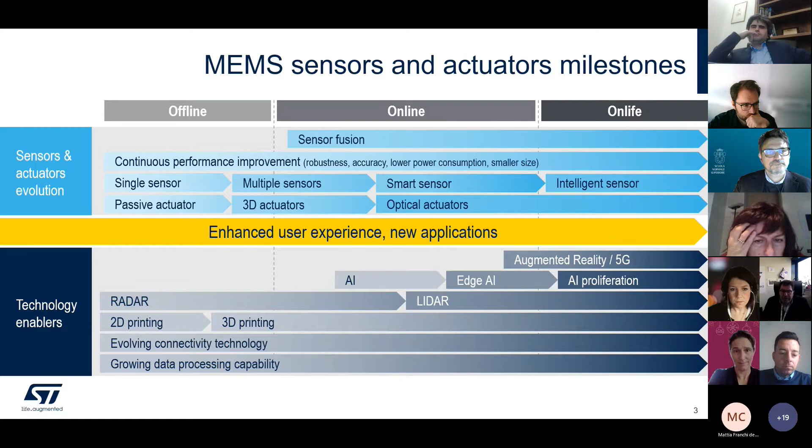With a lot of technology enablers, as you can see, radar evolving to LiDAR, and in the meantime increasing the bandwidth thanks to 5G. But we also have AI introduction with online periods with the cloud and offline processing. Next step was the Edge AI introduction, and now we have a proliferation of different technologies.

If we go a little bit more in detail, again it was a paradigm change. Offline era, 2000-2010, MEMS technology: accelerometer, passives, PC, wearable, smartphone. In the offline era, MEMS was established and ST made the bigger jump, the bigger true penetration inside the usage of this technology in everyday life, in cars, printers, gaming, smartphones. Everyone knows this seems like an archaeological era - you can imagine something that was hundreds of years ago, but it was only 15 years ago, no more than this.

Just an example: we started to interact with our phone, which became more and more a piece of our extended, augmented capability. With the 5 senses, with our brain, with our hands, we enabled the sensors - the MEMS enabled a new way of interacting with the mobile phone, becoming something extremely interesting in terms of human-machine interaction. At the time we have accelerometer, gyroscope, magnetometer, microphone. The list of sensors in the 2000 era was extremely limited.

2010 to 2020, we started with increased usage. As we know, our company is leading the miniaturization, leading not only the R&D and technology enablement of the sensors, but also the manufacturing. We lead evolution, we lead performance improvement, technology fusion - several technologies embedded together, embedding and coupling sensors with MCU, with connectivity, and starting to enable cloud service. In the meantime, sensors were adopted everywhere, not only in consumer but also with different specs mapping onto industrial, medical, automotive, thanks to this increase in performance. And the smartphone started to super-miniaturize and integrate different functions and features.

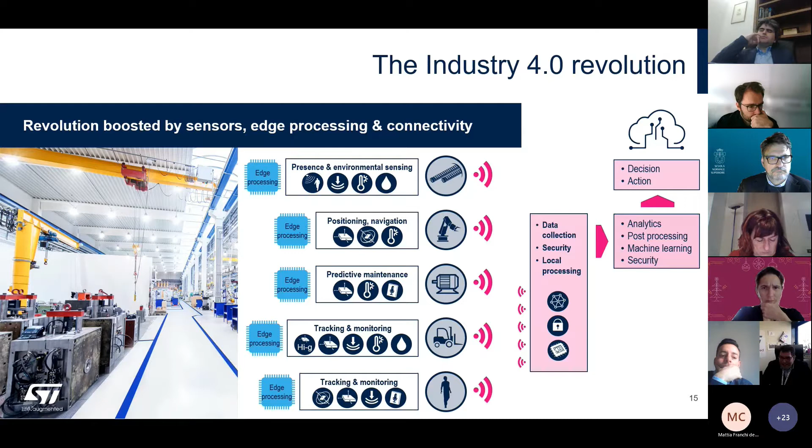Now there is another challenge in this onlife ecosystem, the automotive. Up to date, automotive was only discussing more or less navigation and presence positioning. The connectivity is enabled by V2X, telematics box. But don't forget the electrification revolution: road noise cancelling, battery monitoring, condition monitoring, door modules, and let me anticipate, predictive maintenance of the remaining lifetime of the electric machine.

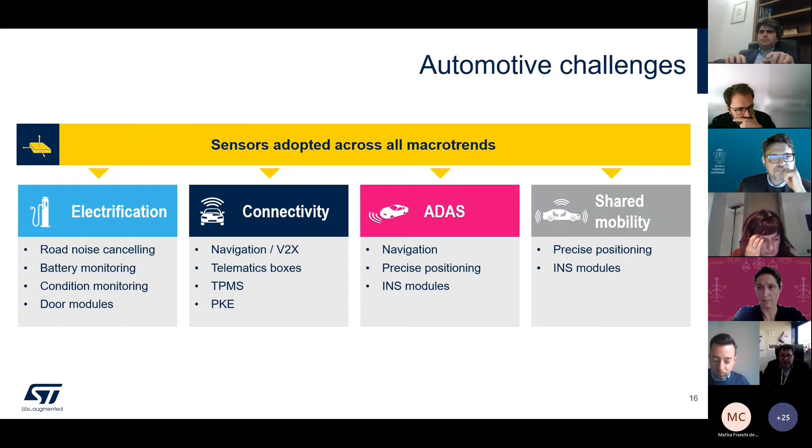Thanks to enabling detection of vibration, gearing and other kinds of nice things that will become the new oil check in your car in the future, when you will have a check of the bearings of your electric machine, or a check of the eddy current inside your electric motors. This is a wave of new introduction, a wave of automotive application, MEMS enabled.

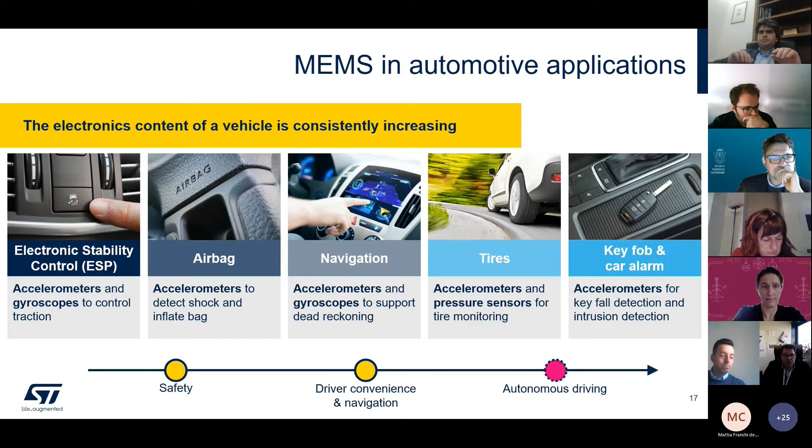Don't forget that these will be, up to today, already available — it's not the future. ESP, airbag, navigation, tire pressure monitoring, car alarm.

On this, we are helping people and the whole technical community to touch, in a nice box, the capability of our processing and sensing. It's ST-WIN, a brand of ST, able to work with Azure or AWS. I let you play with it — it's, let me say, a nice gadget, but is a good way to start to explore our capability.

But if you imagine now what is the next step: the onlife era. Until today, we talked only about sensors, standalone, sensor fusion, and now we're starting to talk about what is the next step. The onlife era, the fusion of technology and life.

Because now, if you imagine these sensors and actuators, you start to imagine the embedding of intelligent devices able to sense, process, and take local action. This way, your personal electronics will start to learn your preferences, your attitude, your habits. Industrial equipment will start to be customized thanks to a wave of new sensing nodes able to talk to each other, but also to decide at local level and enhance productivity, reliability, safety, control.

Just imagine cobots, two, three, four cobots working together, with the capability of safety to avoid collisions, or in the future, trajectory control not through encoders or resolvers, but using the real positioning in space of the robots to close the loop and actuate the electric machine, making the robot able to work.

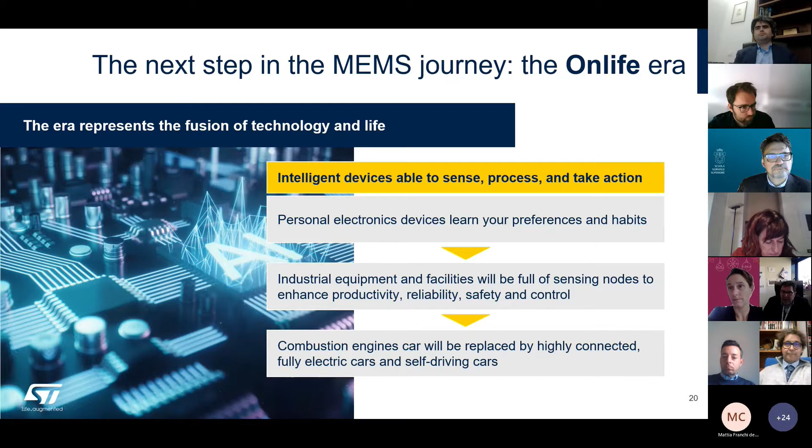So at the end, we are working where systems, where sensors live, are completely different. First decade, offline era: fragmented, every sensor in a place, making a single function interconnected with the main CPU. Online era: connected. Again, we will have a new interwired node data exchange, local processing up to a certain level.

Third step: trained AI at local decision. Maximum privacy — it's not a camera, it's not a detection of your life. It's a pure sensor with the capability to say yes or no, to make an action or not, without transfer of information, except what is needed locally for making the decision that was programmed by the human designer and project.

Where the sensors live is increasing the efficiency, because if you have the possibility to work with a new environment with a lot of sensors helping our equipment and our decisions make a better projection for the future, at the end everything will be more sustainable in terms of efficiency.

If we have an electric machine working in a bad bearing situation, using very bad efficiency in terms of electric consumption for a bearing problem, our vibrometer sensor will be able to detect there is a problem in the electric machine and alert maintenance, or swap to a different mapping of the inverters, able to increase the efficiency and overcome the aging of the electric machine.

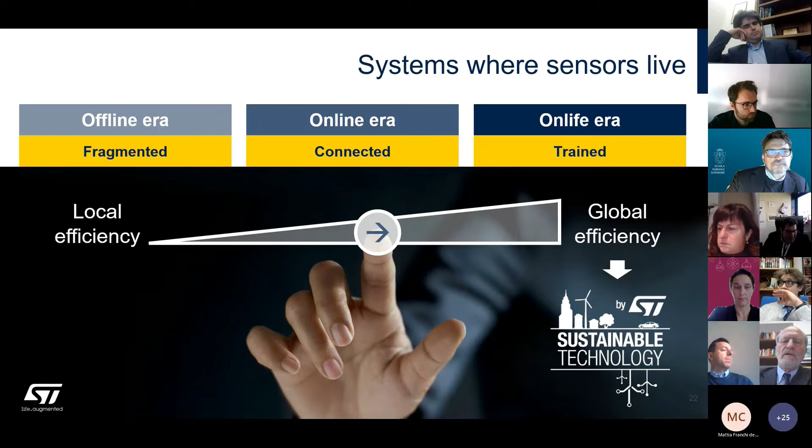Don't forget, in Italy today, just as an example, 65% of electric energy consumption is in electric motors, in industrial and residential, not yet in electric cars. So if we are able, thanks to better control using a pervasiveness of vibrometers, to increase the efficiency by 1 or 2%, we can save a lot of energy, a lot of real impact in the global green footprint.

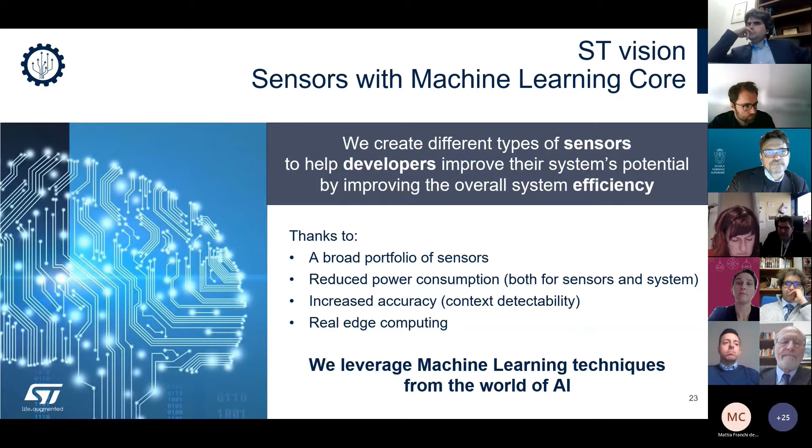But don't forget, we have a vision on that. The vision is to enable sensors with embedded machine learning. We are creating several different kinds of sensors. We have the possibility to help developers, the technical community, work on a broad portfolio of sensors, reduced power consumption, increased accuracy, and leverage, thanks to real edge computing, the machine learning techniques from the AI world in embedded solutions. Just an example, meaningful data.

This can help from the cloud, but not only, because to arrive to the cloud, to execute code in the cloud, to execute an FFT in the cloud for every node in a factory or a fab, is extremely expensive, extremely bandwidth heavy. It's different if you have sensors in the real asset, thanks to local AI able to understand which kind of meaningful data are available. Thanks to the network and connectivity, it arrives to the gateway, and the cloud AI defines only, for example, the virtual model for the extremely high-level discussion, but acting at the low level.

So at the end, we want to work on going from real data to meaningful information to be transferred to the cloud. In the meantime, capture data, streaming, transformation, modeling, and arrive at the data-driven decision, to move to the top level only the portion of the data that is extremely important.

And again, this is something we enable not only in terms of sensors, but also in terms of tools. ST tools able to help you in this fast development and fast prototyping phase, with tools like Algo Builder or Unico, with tools like the NanoEdge AI, the STM32 Cube AI, enabling thanks to the STM32 a lot of features of security.

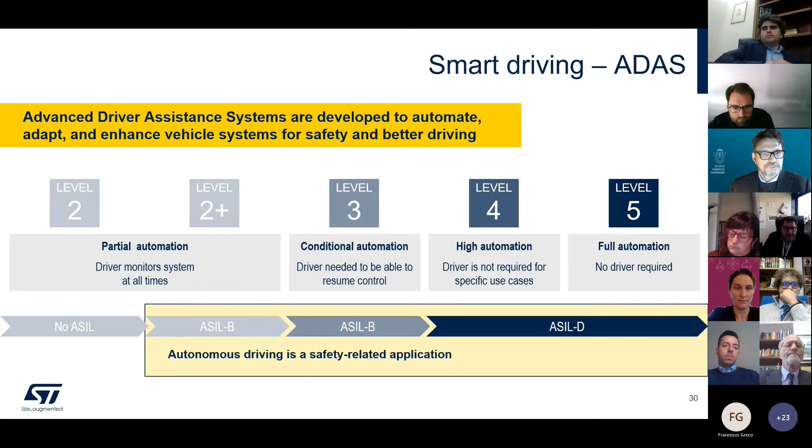You know already our main enabler is on camera solutions, but don't forget that we are working also on the hardware and software layer, starting from the needs and looking at the end solution.

This is my last chart with takeaways. Sensor pervasion will keep the pace. Multiple sensors, interconnected, edge processing. Now we are entering this new era: sense, process, take action. This has enabled a second wave in a sustainable manner.

And now developing sensors and actuators that meet the needs of our customers, partners, R&D people, and developers. This is thanks to the fact that we are pioneers in the sensors ecosystem, and now we are looking to the future, day by day, with you.

This is my last slide. I don't know if you have any questions. If any question, I'm here. And thanks a lot for your time today and for your attention to our value proposition of this online era.

Thank you, Nunzio. It is impressive, the progress of technologies that we are witnessing these days, particularly the slide showing the advancements in 10 years, in terms of metrological performance, power, and so on. It's impressive. Clearly, there is a huge quantity of societal issues that are raised.

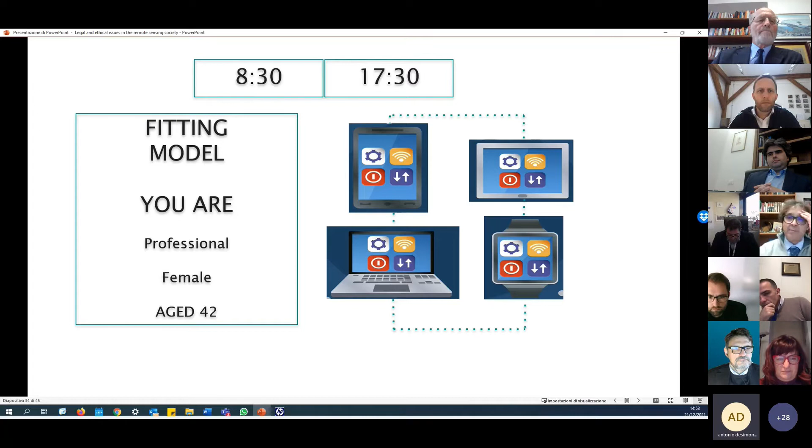All this is triggered without knowing who I am actually. Now I will go directly to the conclusion. At a certain moment in my day, I am my wife. Now, just to conclude, what this means is that either the model gets it wrong, or the model is getting too much right.

It's able, even without formally using or employing any personal data, to target me according to a model that combines and analyzes the different uses of different devices, regardless of their belonging to some person. Which is worse, if you think about it: if at a certain moment in time, maybe every other weekend, I am a teenager or a young kid, this enables another model, a prediction model, to be applied on me.

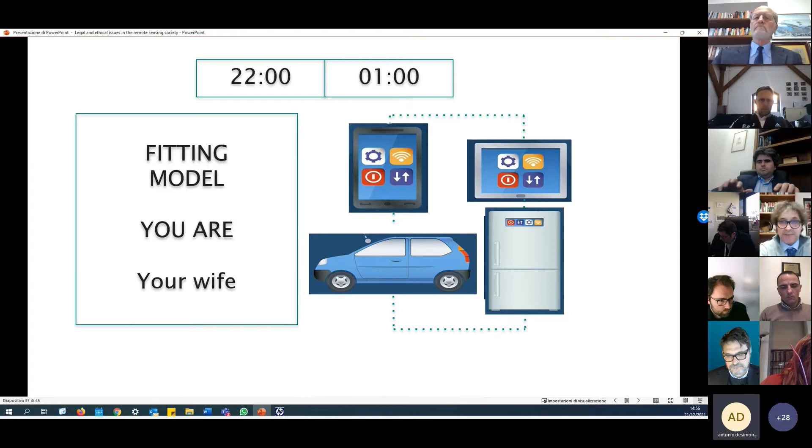We cannot behave like that. At least we cannot stay in the ignorance of what are all the legal and ethical implications and constraints from design to deployment of our sensors. I will not continue with that and just reach my closing slides.

On last century, this was the world. It's not that world anymore. I didn't have the time to insert the new slide, which I will display eventually in another seminar that Calogero will be organizing. Thank you for your attention.

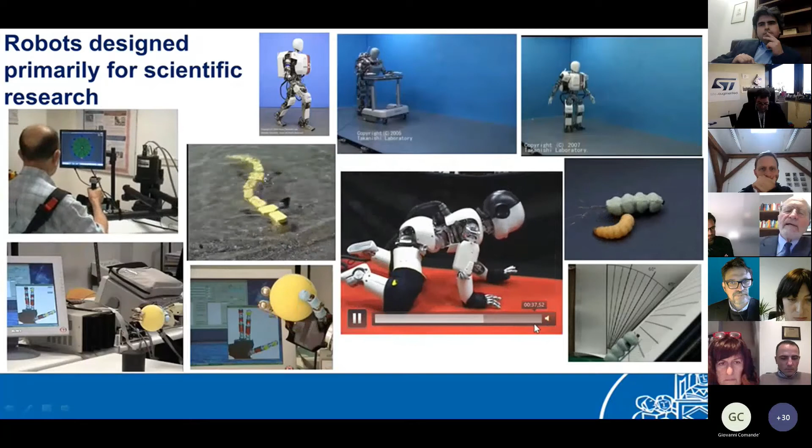First, I'd like to say something about what biorobotics and bionic science is. It's essentially a new wave of work based on the fact that robots are not used just for applications, but are used as a scientific tool. This was not clearly accepted years ago. So we're talking about robot design primarily for scientific research, like we talk about robot design primarily for solving practical problems. This is analogous to what you have suggested for sensing science and technology, or science and engineering.

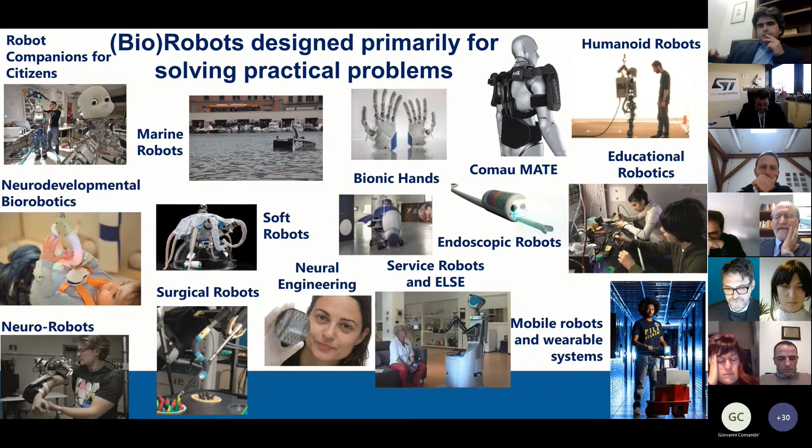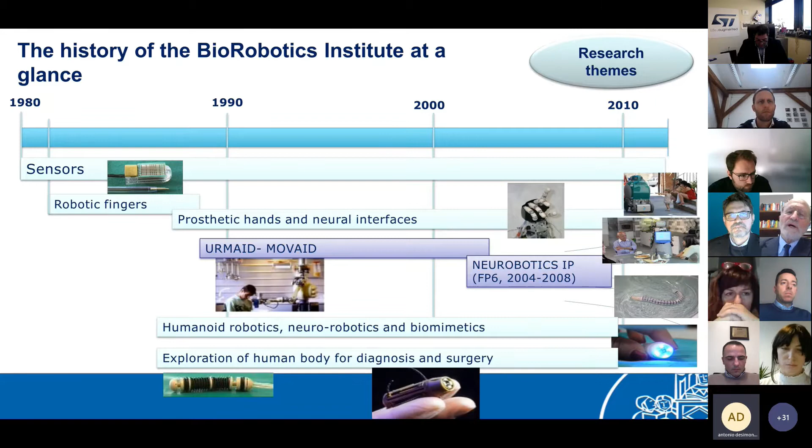So robotics is now everywhere. But actually, my own history and the history of our institute started with sensors. In the 80s, so 40 years ago, I personally started by designing sensors, and then gradually, beginning from the components, we aimed and dared to develop more sophisticated components and systems, essentially exploding into what I've shown before, so into science and engineering.

The concept we pursued is based on a mechatronic platform, because we have always been most interested in the mechanical platform, or the mechatronic platform. For many thousand years, the growth of technology in a broad sense was based on the integration of mechanisms, actuators, energy supply, and some sort of human-machine interface. And this was the history for most of the history of the human species.

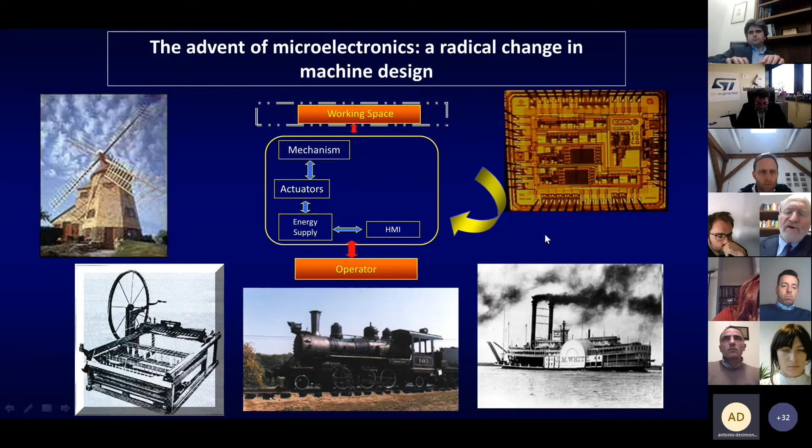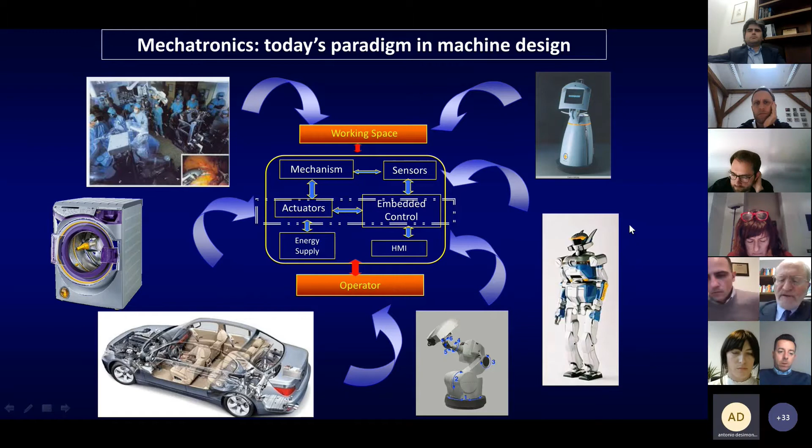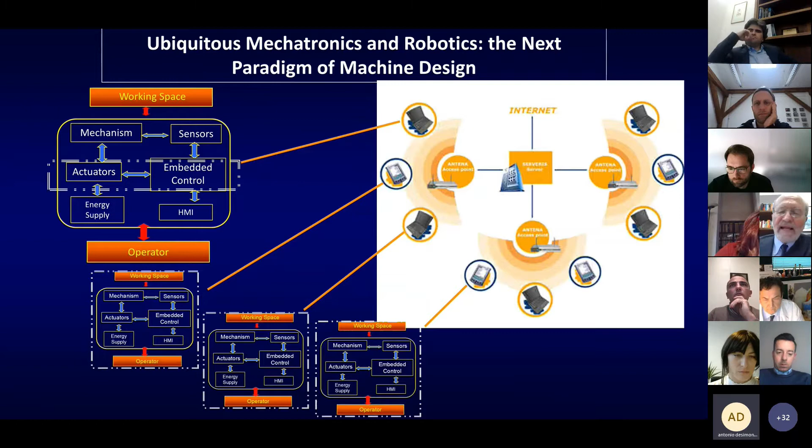But then in the 50s, a radical change occurred: the introduction of the transistor, some sort of intelligence that was then incorporated into the mechatronic platform. So in addition to the pre-mechatronic era, sensors and embedded control, essentially microelectronics, were introduced, so that today all devices, including systems and robots, are made like this, and they are also connected to the web. This is an engineering vision of what happened in the last 50 or 70 years.

And then there have also been talks given by colleagues about micro and nano machines. So micro and nano machines are also the miniaturization and integration of functions of this concept of the mechatronic platform.

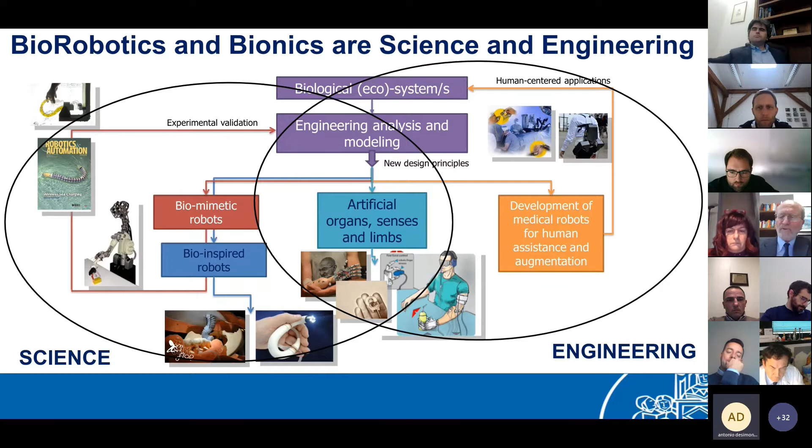In creating this idea of science-based engineering, I was, and am more and more convinced, that the right way to go is like this.

In 1949, the discovery of the sandwich transistor was recognized with a Nobel Prize in physics for people like Shockley. Then came the development of technology like transistors in computer design, the microcontroller, microcomputer, and eventually the robot that started in 1972 as the integration of mechanical engineering. This was developed at Waseda University, and microelectronics.

So from science to engineering. Actually, this idea has now been fully recognized by the emergence of journals like Science Robotics, by far the one with the largest impact factor in robotics. I've been a founding editor of this journal, and also of the Transactions on Medical Robotics and Bionics, of which I'm editor-in-chief.

So science and engineering is smoothly connected. I'm going to share with you a couple of examples of what this means, and how this is related to sensing science and technology.

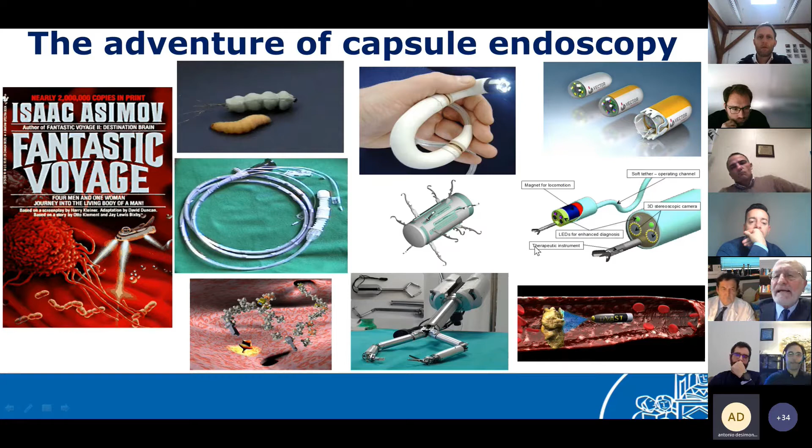For example, the adventure of capsule endoscopy, starting from real science fiction if you will, going to biomimetic analysis, and then to highly integrated classes of devices, just like this representation given by three very visionary surgeons — the concept of a miniaturized tool incorporating a number of functions, including many sensors and many actuators, many robots if you will, to perform operations inside the human body.

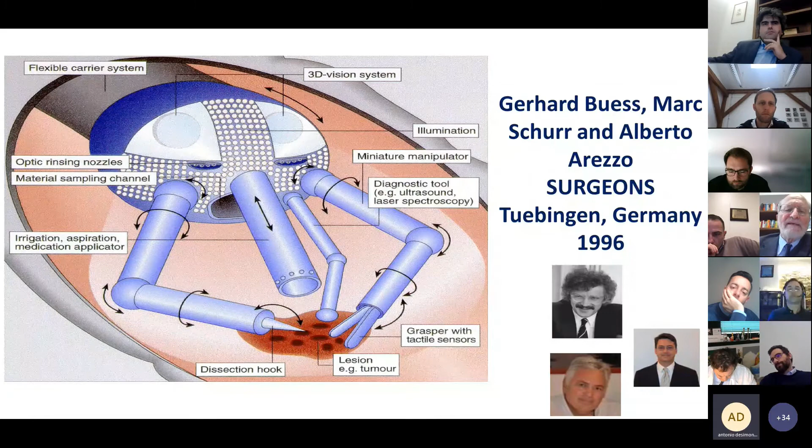In the early 90s, we were inspired by observation of animal creatures like worms to develop this. By the way, I'm very pleased to see here people who were my colleagues, actually my students or PhD students at that time, who are now all full professors — but not only that, they are deans, they are rectors, they are ministers, and so on.

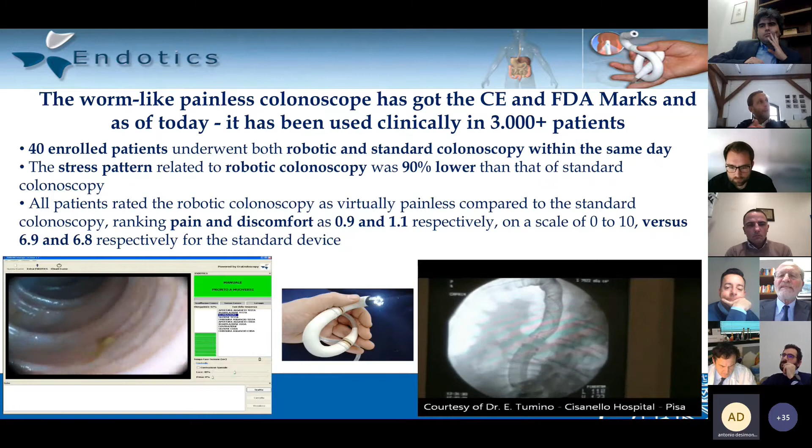Starting from this crazy idea at the time, we developed a painless colonoscopy system based on inchworm-like locomotion. Today this is a product — in fact, a startup company that we created at Scuola Superiore Sant'Anna is producing an inchworm-based colonoscopy system that has already been used in more than 3,000 patients.

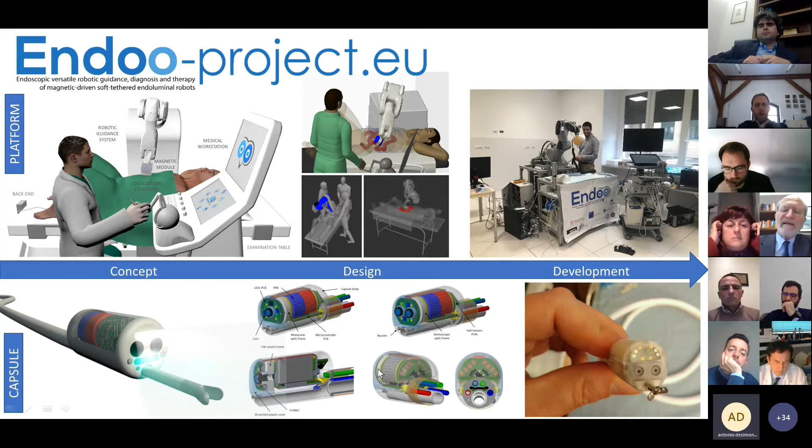There is more, as you can see, with a lot of sensing capability — for example, a very, very high resolution camera here inside this capsule, and robotics used. But this is just the beginning of an entirely new way of thinking about endoscopic capsules.

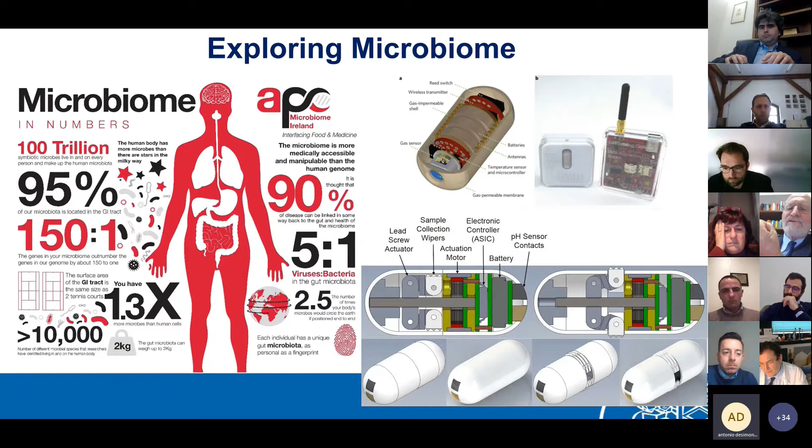For example, a capsule that includes sensors to monitor gastrointestinal health at large, many factors, and you see how a pill is full of sensors and processors, very high quality, very highly integrated, or how many different new sensors could be included in this hardware, if you will, to explore the microbiome.

Or even new configurations could be explored, like, for example, an origami robot, in which micro robots could be assembled, or an electronic nose for colorectal cancer diagnosis. This concerns the area of entering the human body with sensors and actuators, exploring and transmitting.

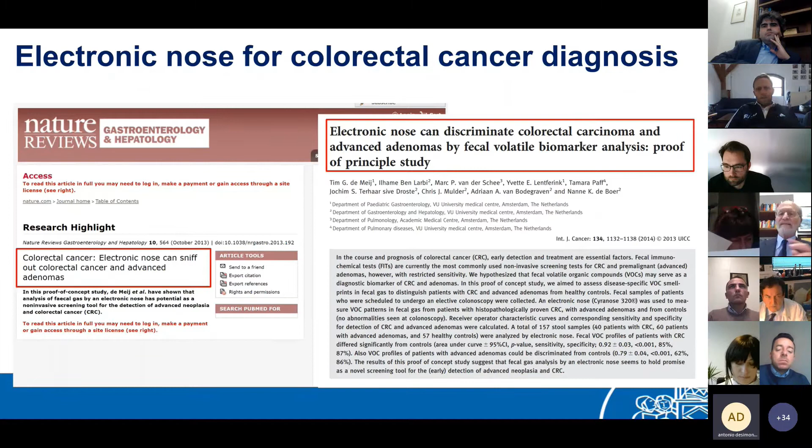So there is another very interesting example, that of the hand.

I was inspired by a movie like Star Wars to develop sensors of different kinds for hands, prosthetic hands, and robotic hands.

And here again, there are many people, including some that you have seen — Calogero is here, by the way, and Silvestro is here, and Alberto is here. So very interesting, once again, a vision and a dream, and the importance of sensors in this was also absolutely remarkable.

Together with Danilo De Rossi, in 1984 we published the first solution to a skin-like layered sensor, which was then developed by many others, including Beccai, now a PI at the Italian Institute of Technology, and Massimo Bergamasco, professor and director of the new Institute of Mechanical Intelligence. After the sensor, we were very sophisticated, by the way.

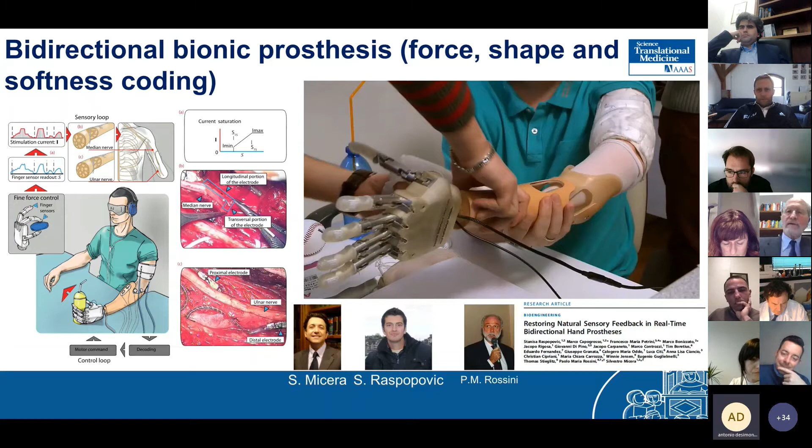We were able to mount the sensor on a fingertip and connect the hand with the fingertip to the brain. You have already seen the development of this concept, essentially from the sensor to the finger, to the hand, to the arm, to the connection with the peripheral nervous system.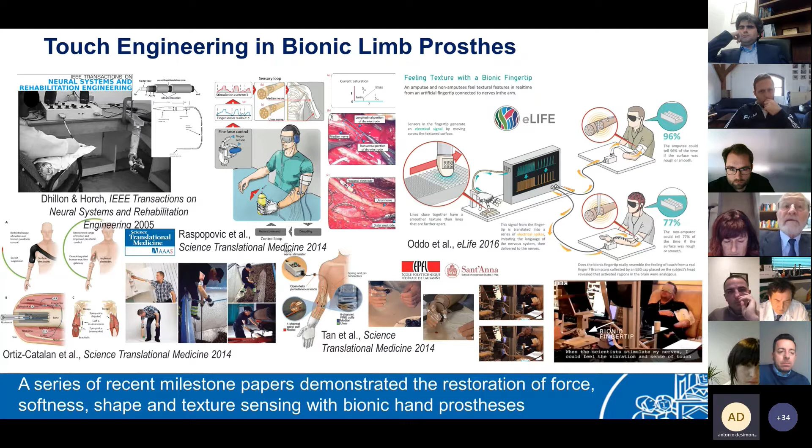With colleagues like Calogero, who now lead this field of touch science and touch engineering for bionic limb prosthesis, but not only, this was achieved at EPFL, and Silvestro was also part of it.

Essentially, we are close to enabling people with paralysis, paraplegic or even tetraplegic in some cases in the near future, in any case with spinal cord injuries, to regain control of their leg muscles. This was really science fiction, but we are now at the frontier and ready to go.

I conclude by adding to what Professor Comandè said, something we faced earlier because this is what we were really involved in: when dealing with connecting an artificial system with the neural system, essentially we are developing cyborgs. This is the definition of cyborgs, if you will.

In a paper written 20 years ago, in this case on Nature, colleagues were working with chips or electrodes with a controller directly inserted into the nervous system or brain of animals, like a mouse, a pigeon, or insects, who were controlled by the experimenter by means of a joystick - a mouse controlling a mouse, if you will.

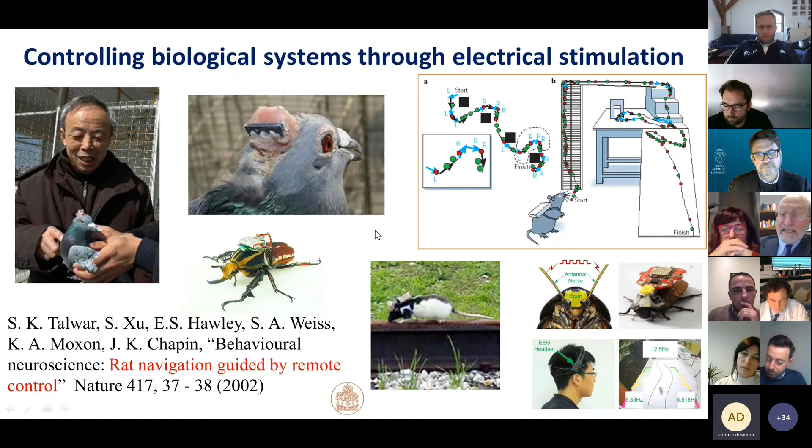While coordinating a major European project like NEUROBOTICS, which generated an immense amount of new knowledge and technology, I personally had to face objections by the European Union about ethical, legal and social issues. So I was asked to report to the Ethics and Science Committee of the EU.

I had an ethical review. The ethical issues raised were about respect for human dignity, respect for dignity of other animals, in particular primates, and potential misuse of the technology like warfare. We got recommendations from the ethical panel, and we answered in a convincing manner, so that we were able to start worldwide the development of the area of roboethics, based not just on curiosity but on real problems, real cases.

So what were we doing in developing these bionic prostheses connected to the brain? We dealt with augmentation, but actually we were also connecting, like in cyborgs, an external system to the intimate area of humans, and also animals. This is certainly a very short, but I think quite interesting, description of what we have done.

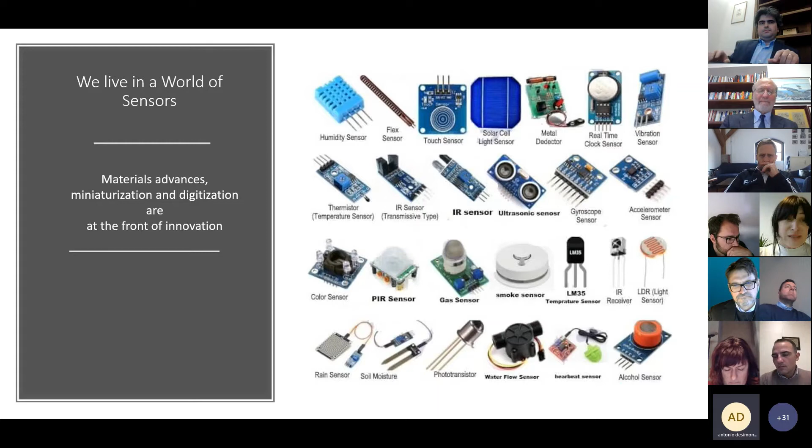We learn how to miniaturize these devices, and also due to digitization, the sensors are now at the front of innovation. And this is a really nice overview of the global biosensor market.

So my opinion is that futuristic intelligent systems will incorporate this sensor technology to recognize visual, tactile, olfactory, audio, and physical senses—and not just futuristic systems, because we already saw these systems existing in the numerous presentations today. So I think the task in front of us is their further advancement and the training of new engineers and scientists in the field.

If we look at basically any definition on the internet of what sensing technology is, you could find that the definition is that this is a technology that uses sensors to acquire information by detecting physical, chemical, or biological property quantities and convert them into a readable signal.

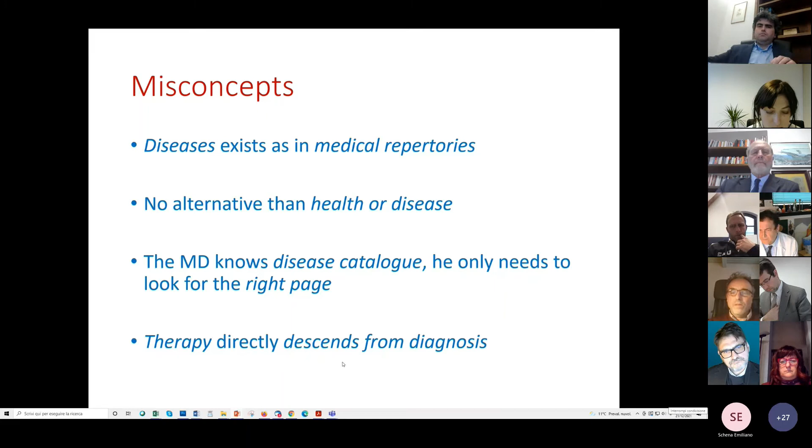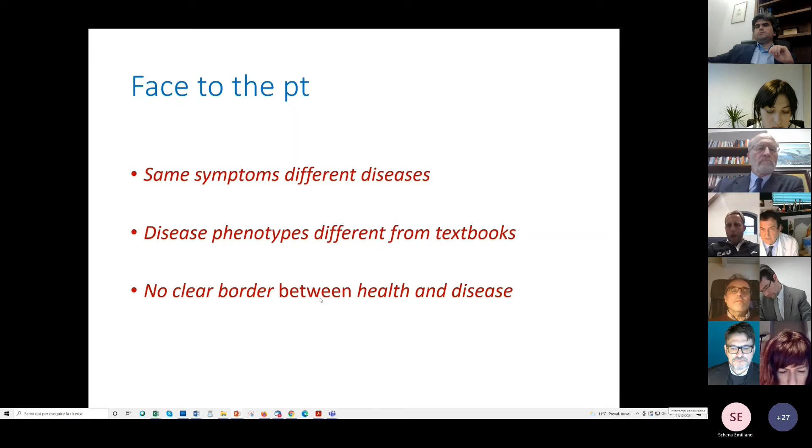Faced with the patient, actually the same symptoms underlie different diseases. Disease phenotypes are truly different from the paradigm described in textbooks, and there is no clear border between health and disease. This means we have to look to novel approaches in medical education, which begin by changing the object of our teaching.

These are some of the medical courses we have decided to start over the next few years at the Scuola Superiore Sant'Anna: medical reasoning, that is pathophysiology, technology, and ethics in medical reasoning, ethics of care, error in medicine, medical humanities, communicating with patients, and narrative medicine. So the future medical doctor will be a medical expert.

So not only with professional and scholarly growth, but in our vision they will be a health advocate and communicator, collaborator, and also a manager, in the sense that organizational skills will also be necessary in their profession.

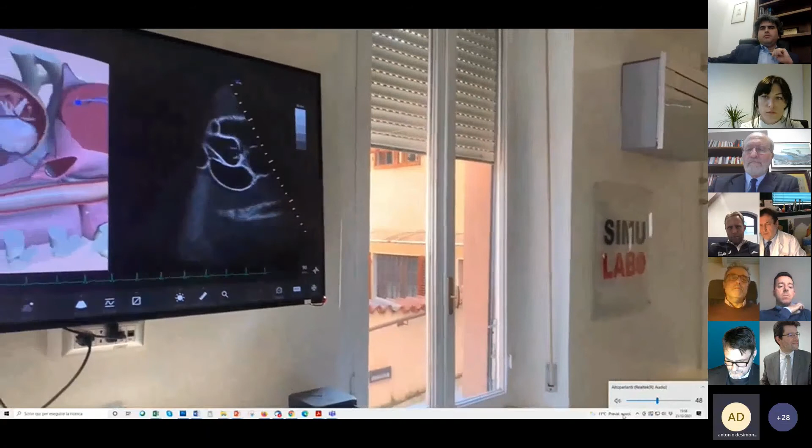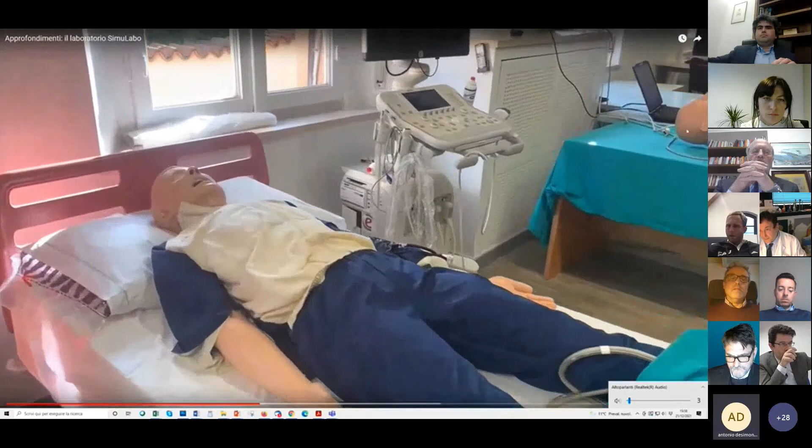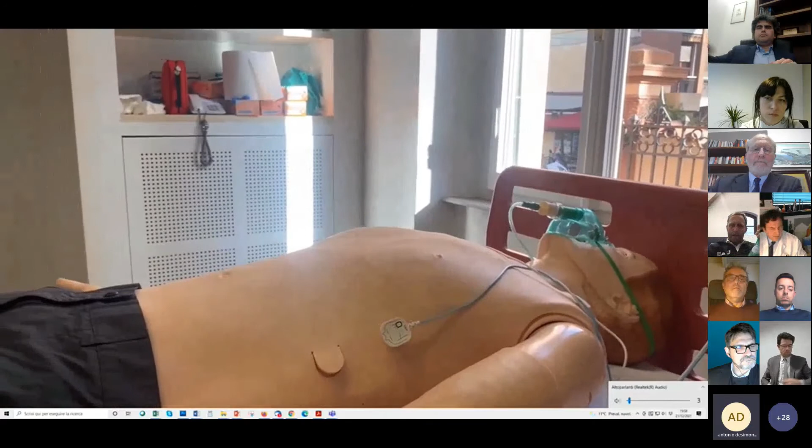One is dedicated to teach and learn echocardiogram and echography, transthoracic and transabdominal ultrasound diagnostic procedure.

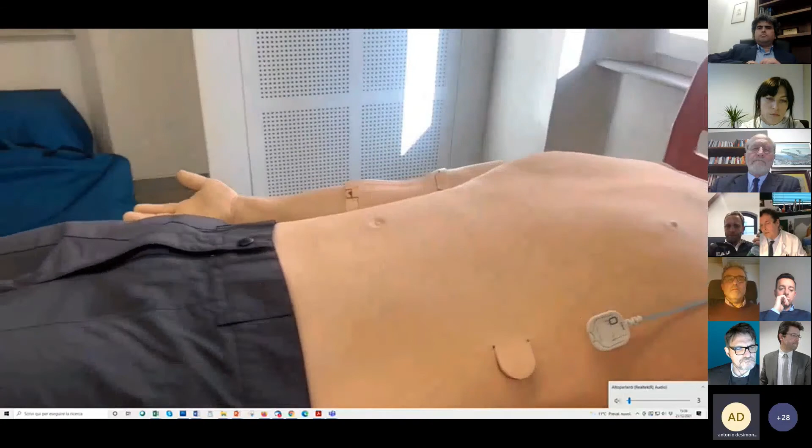This one is a very specialized mannequin, which is dedicated to teach emergency acute cardiovascular disease management. There is afterwards a debriefing session where the behavior of students, which is filmed before, may be entered, and every kind of possible mistake or difficult decision is then discussed and corrected by the teachers.

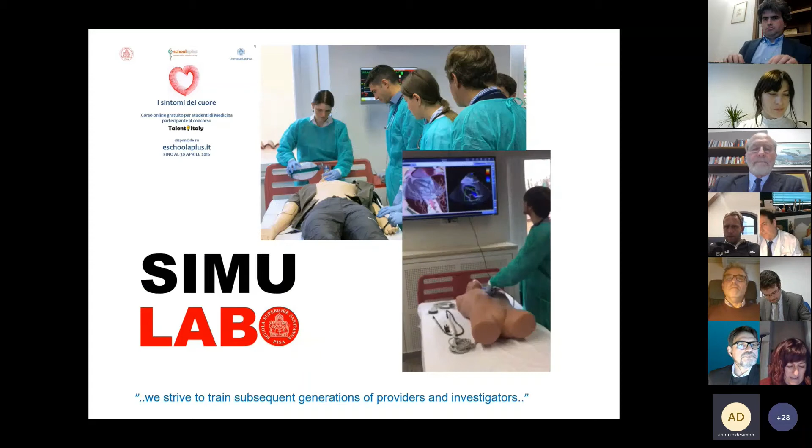This approach is dedicated to the medical students of the Scuola Sant'Anna, but it is also opened to medical students of the Universita. We use not only commercial tools, very sophisticated, as we already mentioned for the EELISA meeting. We have also asked our students to work in a different setting.

Here is present Barbara Henry, who was a collaborator in this project. At the time of the 80th anniversary of the racist legislation in Italy, we asked our students from the Scuola Normale Superiore to remind the experiences of students and teachers which have been expelled at that time from the Pisa University.

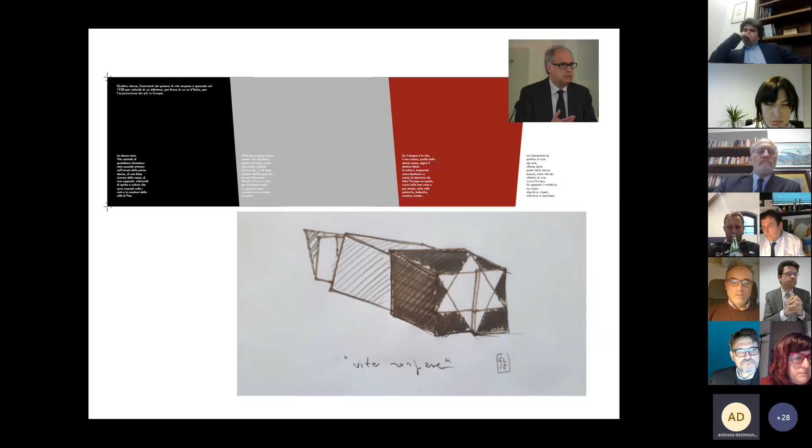This happened a beautiful day. Everyone can review it on the YouTube channel of the Scuola, and also by reading this book. But we decided also to perform an installation which was set in the church of the Scuola, and this experience, which you can see here in this video, was thought by ourselves and two artists, Ferrari and Gianni Lucchesi.

We built 4 rooms which were the metaphor of the historical events since 1938 up to 1945. So 4 rooms, black, gray, red, and a white one, but afterwards we decided to make it virtual, thanks to Massimo Bergamasco.

And his collaborators. So this use of virtual reality, this is the rendering we could have wearing the Oculus. We are not speaking about the sensor here, we are talking about perception, which is actually another important step.

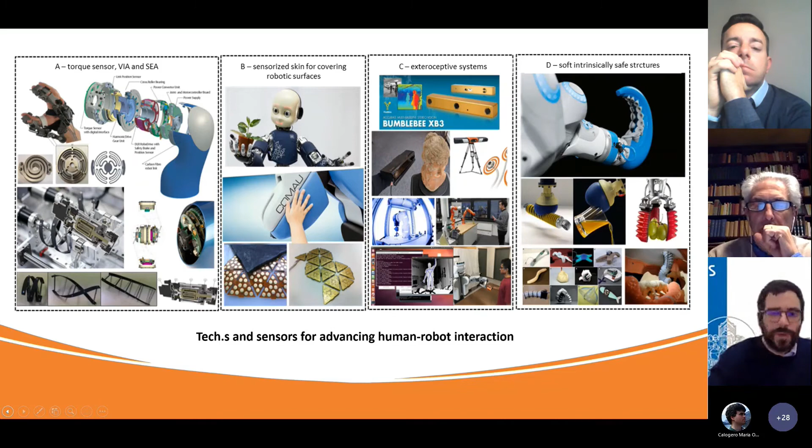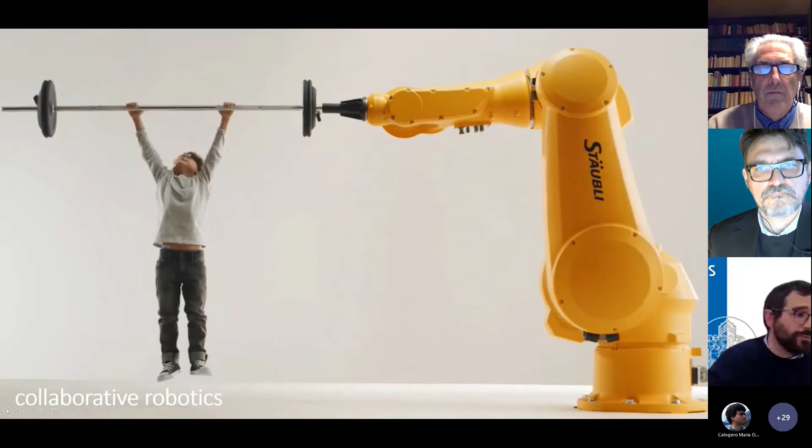I think all of you have already seen the use of skins and sensors that, in the most promising cases, are attached, glued, or fixed onto existing systems—because an engineer also has to consider retrofitting, adapting existing technologies to the new world, new environments, and new needs. Creating this smart skin can make standard robots collaborative, or make collaborative robots more advanced in human-robot interaction. This is what we actually did at the Biorobotic Institute, starting from the technology.

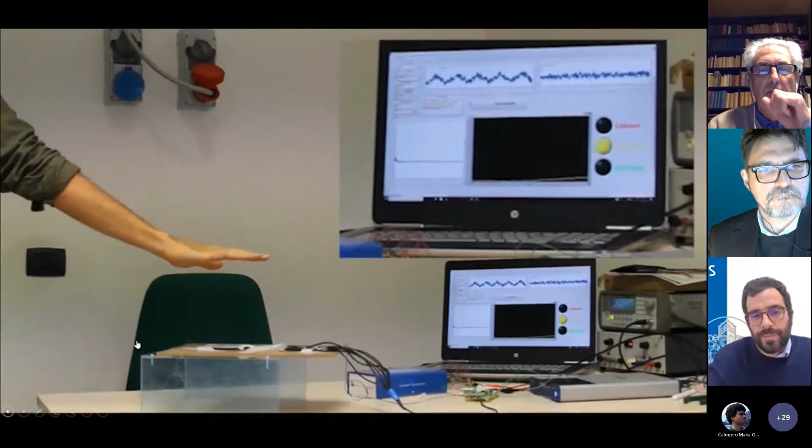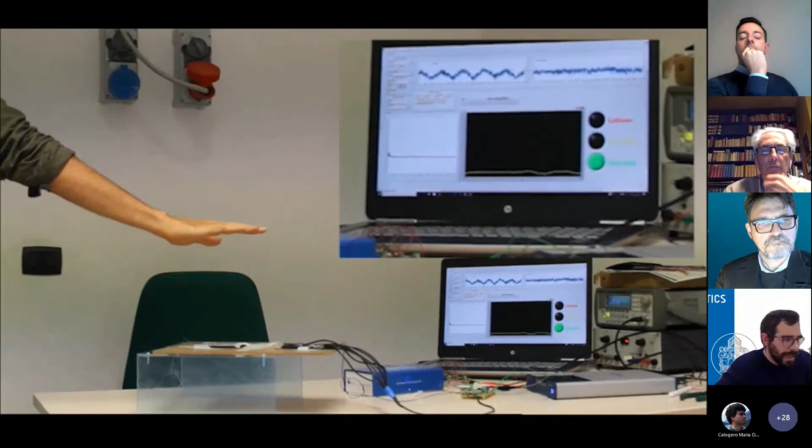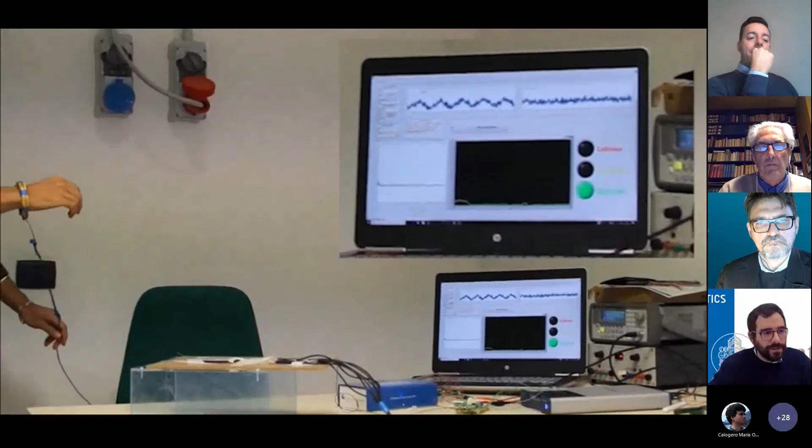You don't see the technology now because it's a layer as thin as paper, and this capacitive sensor is able to detect the proximity of a person at a few centimeters. So we started by the principle and technologies. These technologies are also more and more enhanced by active elements that can be worn by the user. My colleague is wearing a bracelet, and the same response is now possible at more than 50 centimeters, when it was possible at only 15 centimeters without the use of active elements.

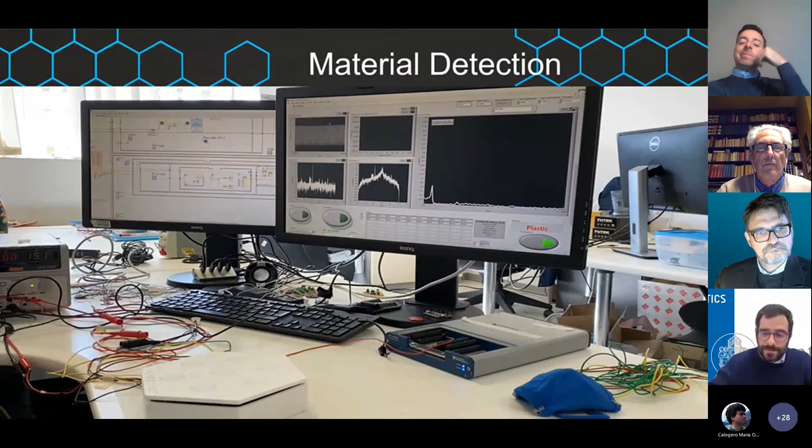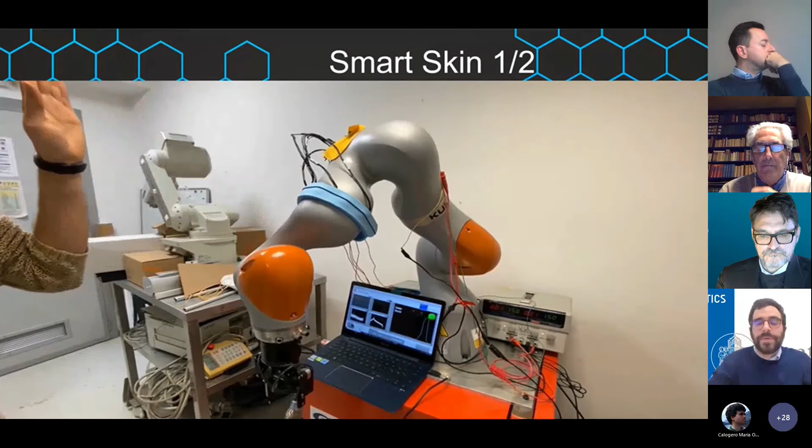What I want to say is that we can work on sensors for robots, but we can also work on sensors for humans, and we can work on the combination of sensing technologies for all the movable objects and things and persons in a complex environment. This sensor can be flexible and adapted to any structure. We decided to melt it into a soft skin, so we have bracelets that can be attached to any kind of robot to make them collaborative. Our goal is to create a technology, define an application, and design and develop a system that can be adapted to new and smart robots.

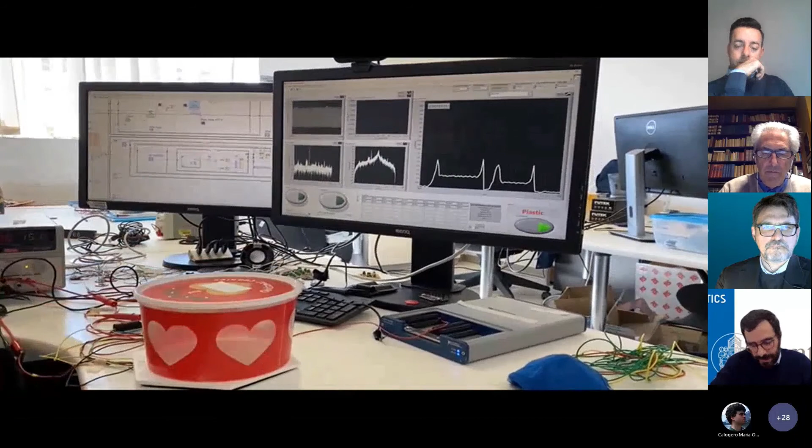These technologies are not only possible to use as a proximity detection system, but can also be used for detecting materials. So you see here a fast description of the sensor technology reported into this white box, and on the screen of this monitor you can see what is actually recognized based on the object that is close to the sensor, because the sensor is important, but intelligence, bringing this information and combining it, can be used for different applications.

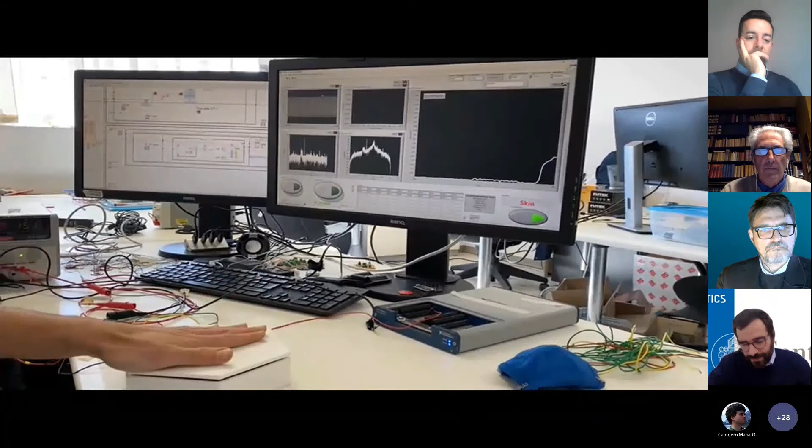Sometimes we fail because the empty bottle of water is not recognized. We recognize a bigger box of plastic, but that's because we still have to make our sensors, and in future the robot, smarter and more intelligent.

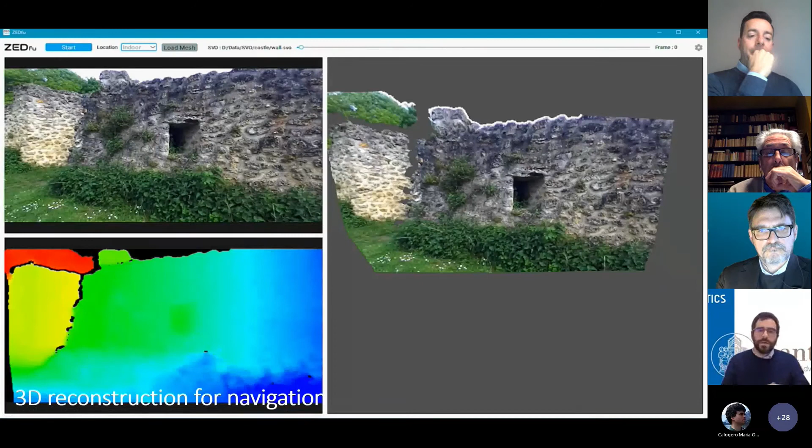I'm moving on. Sensors are important in order to perceive the environment. We can use vision-based external sensors that now are, I would say, the state of the art in order to reconstruct the environment, and use this information to navigate mobile robots within unstructured environments. As I told you, and then I will close this intervention, all the information from sensors has to be used and exploited in the right manner thanks to artificial intelligence, or deep learning techniques.

What you see here is an algorithm that we developed for polyp detection. What you see here is a human colonic tract, and with our algorithm, trained with a huge amount of data, another important aspect to consider is how to retrieve big data, and how to retrieve it in a standard, high quality manner. This data can be used for enhancing medicine.

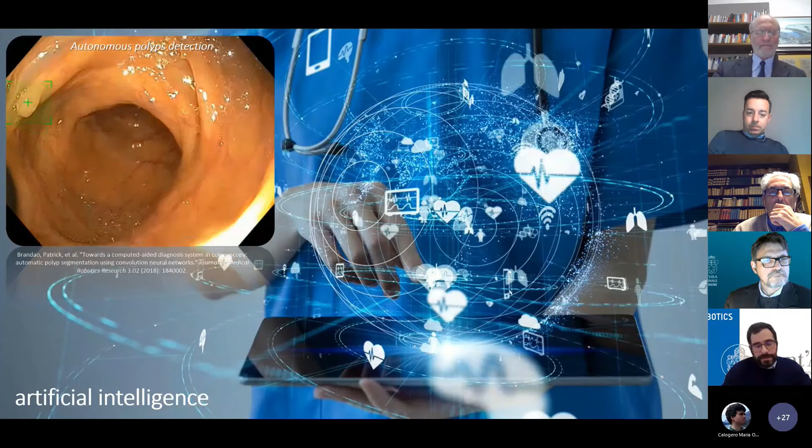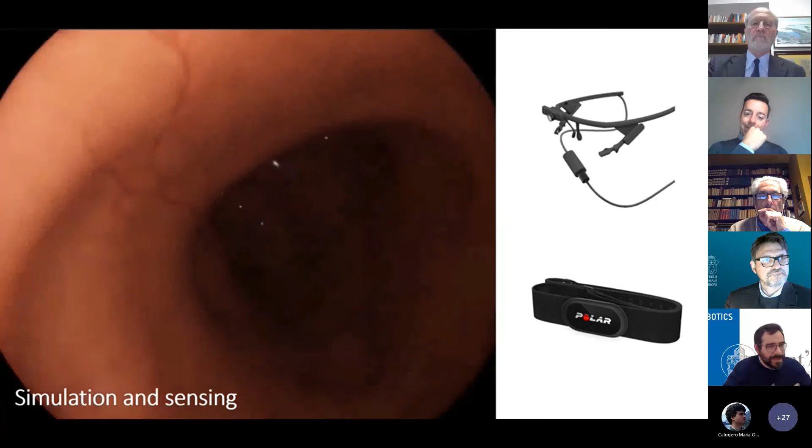I will conclude by showing you a simulated environment. This is a simulator that we designed, a virtual simulator. Why sensors? Because it's also important to use sensors in order to train the user, but also to understand how a user is compliant with the environment, which could be physical or virtual. We are designing and making a study on evaluating the cognitive load and the acceptance of new interfaces, meaning a new way of controlling robots for a new generation of technologies, for new paradigms of medicine.

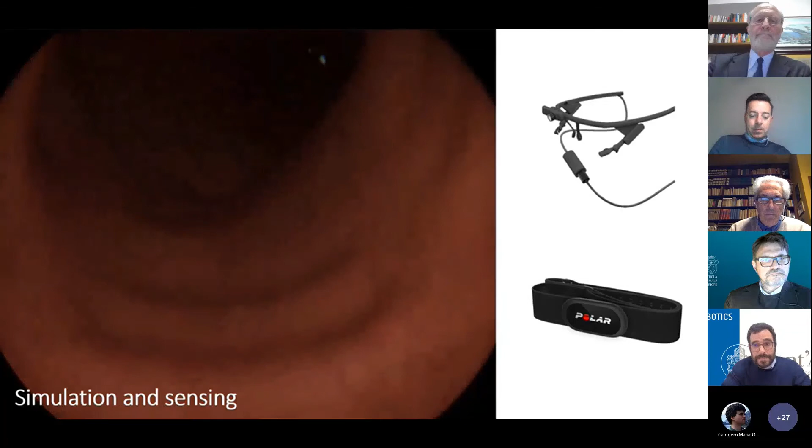I conclude here. I would like to say a lot of things, but I need to leave the words to my colleagues, and thank you very much for this occasion.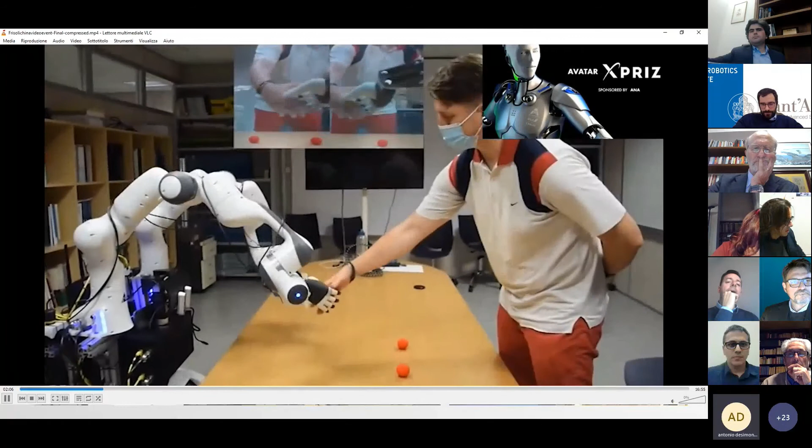Just to give an idea of possible applications on which we work, these are some images of a telepresence system, where basically the idea is that you can transfer remotely to an operator all the capability to perform everyday life tasks.

And of course, this is a collaboration with the institute, with the area of artificial hands, so Professor Cipriani and Marco Controzzi in Biorobotic Institute.

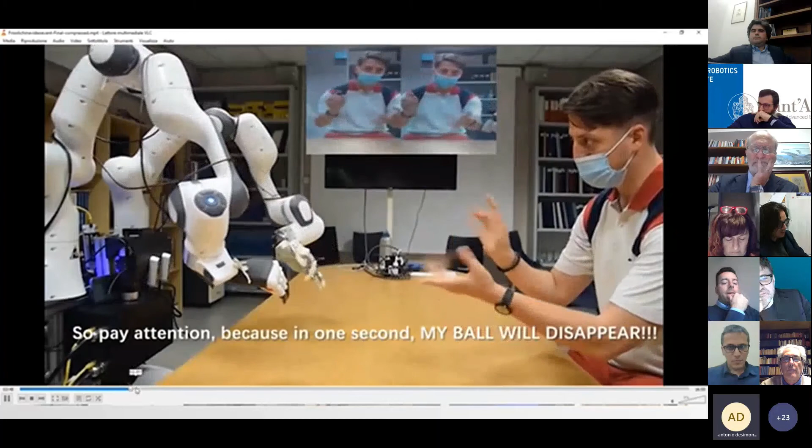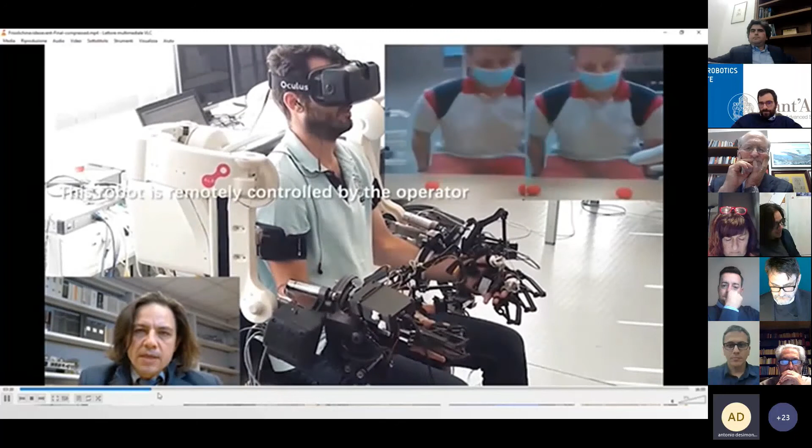Basically, the idea is that if you want to have, from the sensory point of view, a feedback that is not only visual, but related to the sense of touch, you need to have on the robot side the capability of getting this information. So you can see what the operator is doing on the other side. He's basically floating his hands in the air, and at the same time getting artificial sensory feedback of what is happening on the other side.

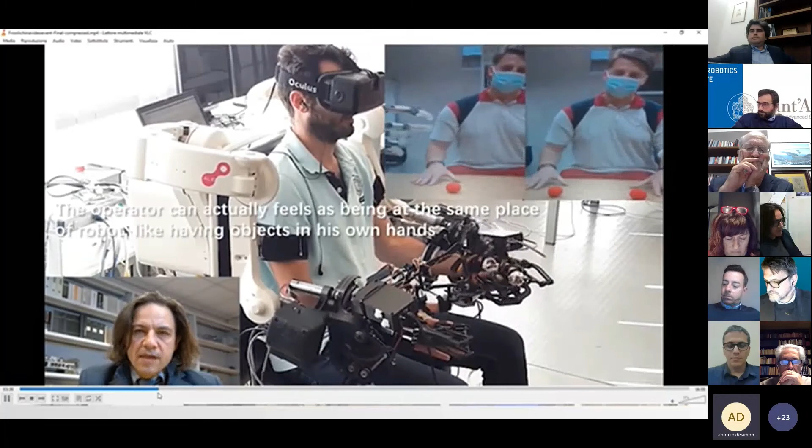And this is one of the relevant areas, but this also has an impact in rehabilitation, where the same approach can be used to provide conditions for robotic assisted rehabilitation.

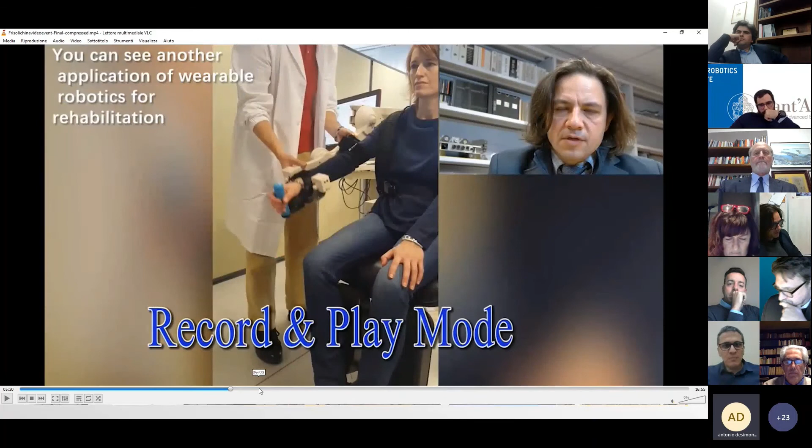Just to have a very short overview, you can use this technology to implement telemedicine. Here you can see how you can use the same kind of technology to explore this dimension, and to consider another - these are some images from rehabilitation.

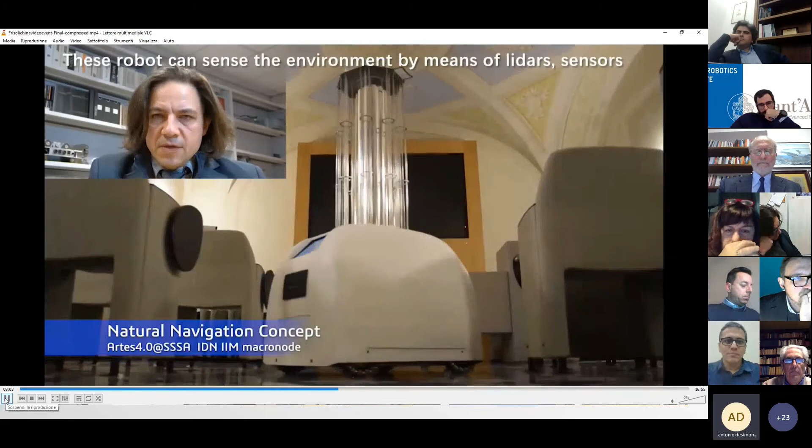And just to give another idea of possible applications of robotic telepresence technology, during COVID-19 we developed platforms for UVC disinfection. Also in this case, it could be important to remotely control this kind of robot that is capable of performing disinfection of environments.

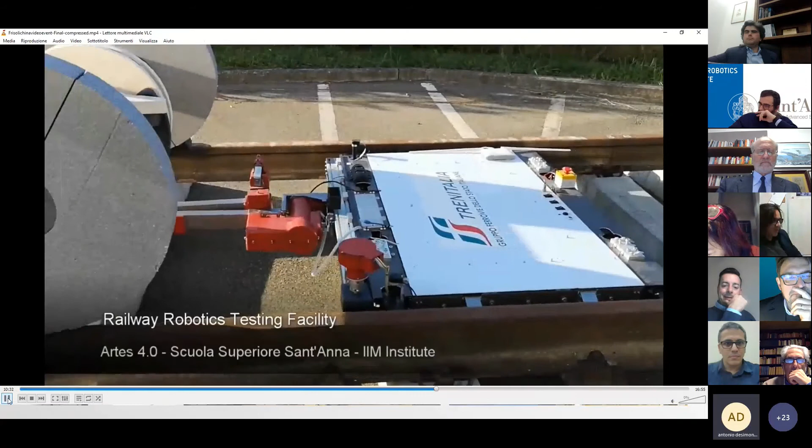And on the other side, another relevant field of application is industrial inspection. Here you see some examples of robots that can be used in the context of railway, so the operator can remotely inspect parts of the train. In this case, we consider predictive maintenance for increasing safety in railway transportation.

So these are just the sharing of some contents, and I leave the floor to the next speakers.

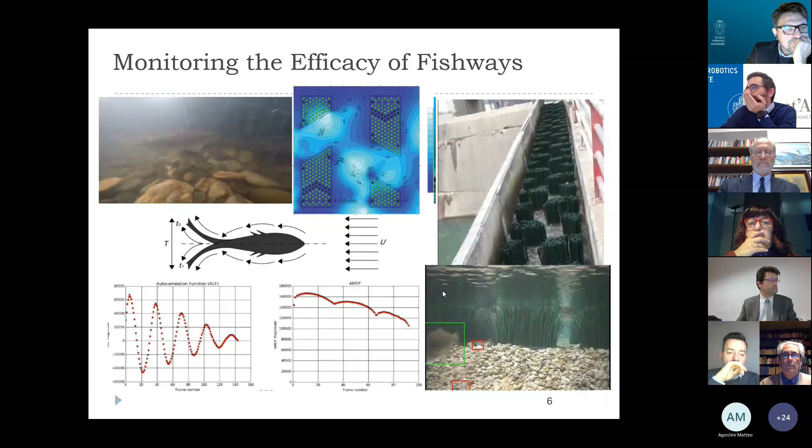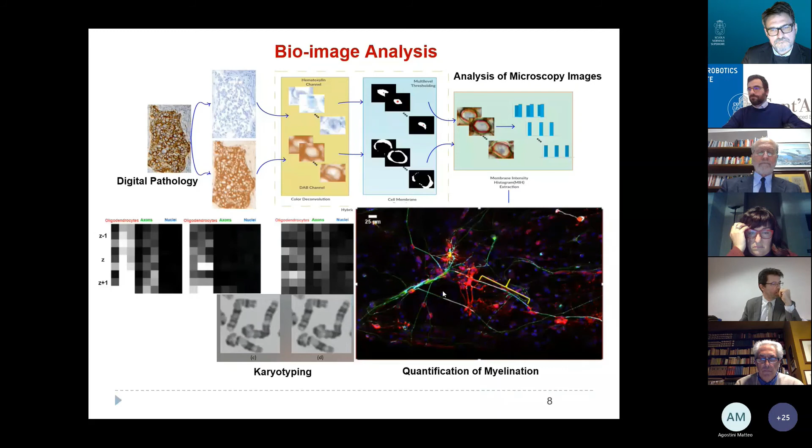So briefly, this was all about my group's work on different sensor applications. If you want to get in touch with us, you can check our group's website as well. Thank you for your attention, and if you have any questions, please go ahead.